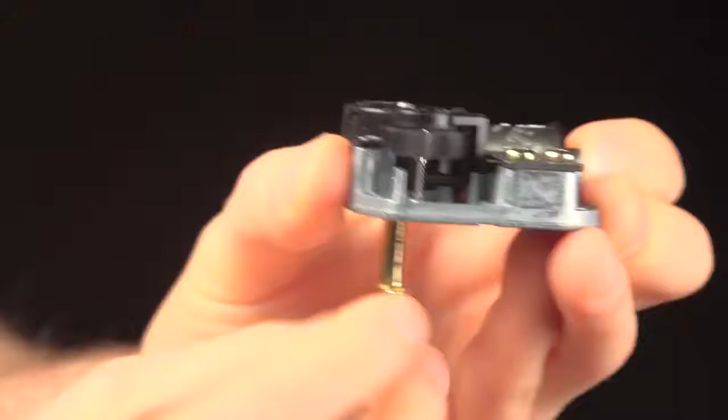Automated music boxes began as cumbersome sets of bells struck by hammers, but over the course of several hundred years, they've evolved into compact devices like this one. I'm sure you know how it works. Wind it up, and it plays a tune.

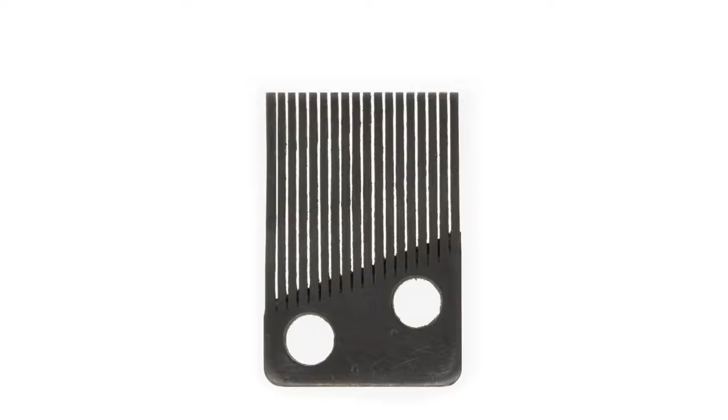The melody is programmed on this rotating drum. The drum has protrusions called pins that pluck the teeth of the comb. The comb is a piece of steel with 18 teeth. Each tooth is a note. Longer teeth are lower notes, and shorter teeth are higher notes. The comb works like a multi-pronged tuning fork.

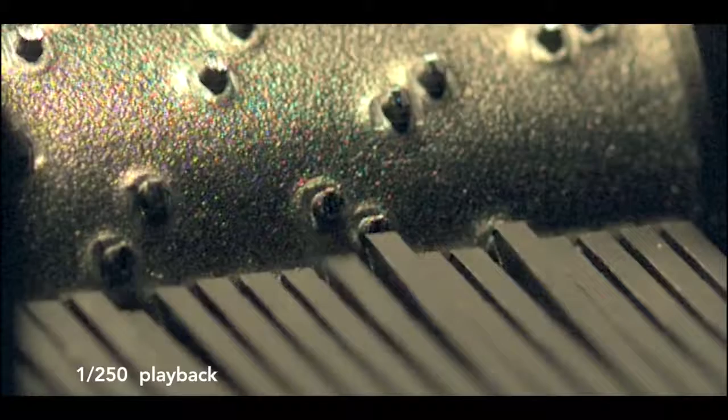In this high-speed video, slowed by 250 times, the drum appears not to move, but you can see the teeth vibrate. The shorter tooth is vibrating faster than this longer one. These vibrations produce the sound.

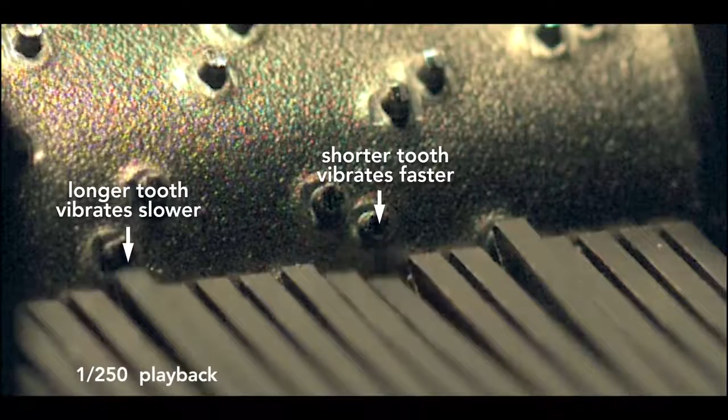The teeth are like this saw blade. When it's longer, it produces a lower note when plucked, and when shorter, it produces a higher note.

Notice when you turn the comb over, the teeth don't have the same thickness. The longer teeth, the lower notes, are weighted more on the ends. This added weight lowers their resonant frequency even farther. Here, I taped a lead weight to the end of the saw blade, and it produces a lower note than without the weight.

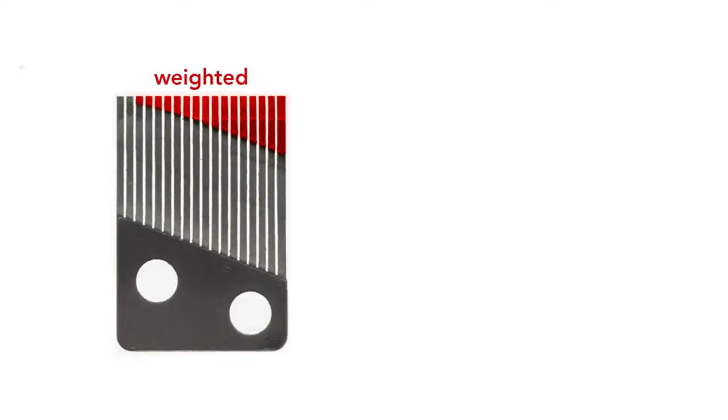Because of this weighting, the comb is more compact. For this particular design, if the comb were unweighted, it would have to be roughly 40% longer to produce the same range of frequencies. Another advantage of the weighting is that the combs can be mass manufactured in a single size. You just cut away the proper amount of material to produce a unique set of notes.

For example, although each comb has 18 notes, the specific notes vary for a particular song. Here's a music box playing London Bridge with a comb specifically designed for this melody. And now here it is with a comb cut for a different melody, This Old Man. The timing is the same, but the notes are different, and it sounds odd.

The difference in weighting is so subtle that these two combs are indistinguishable by eye.

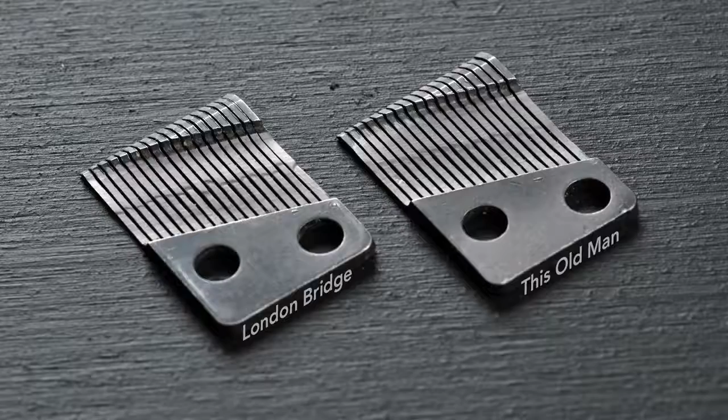Inside the casing of the music box is a clock spring. It's a coiled strip of steel that is 40 centimeters long, unwound. The outer end of the spring has a T-shape which affixes to the casing of the music box and so holds it in place. The inner end of the spring has a slot. This slot hooks into a notch on a metal shaft. This shaft is attached to the winding key.

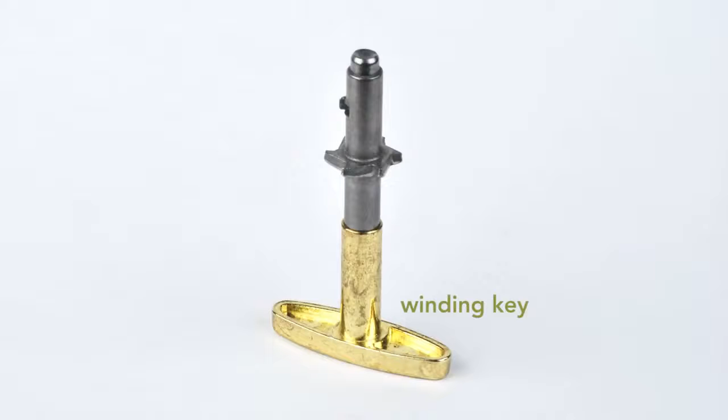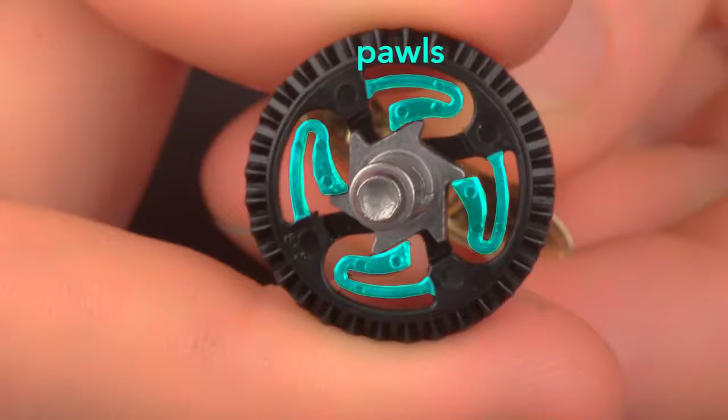The shaft also has an angled 6-tooth ratchet gear. This gear fits inside this larger plastic gear. On the inside, there are 4 flexible pawls so the axle turns independently from the plastic gear. This happens when the music box is wound.

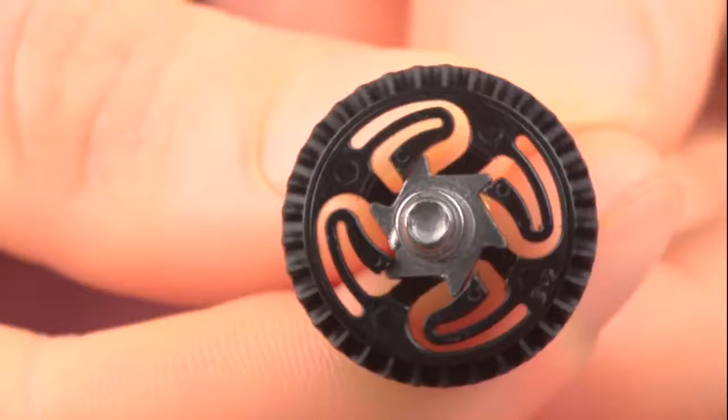When the spring unwinds, the axle turns in the opposite direction and the 6-tooth gear catches the pawls, which rotates the larger plastic gear with it. This rotation drives the music box. As the spring unwinds, it rotates this bevel gear, which engages a second bevel gear affixed to the drum.

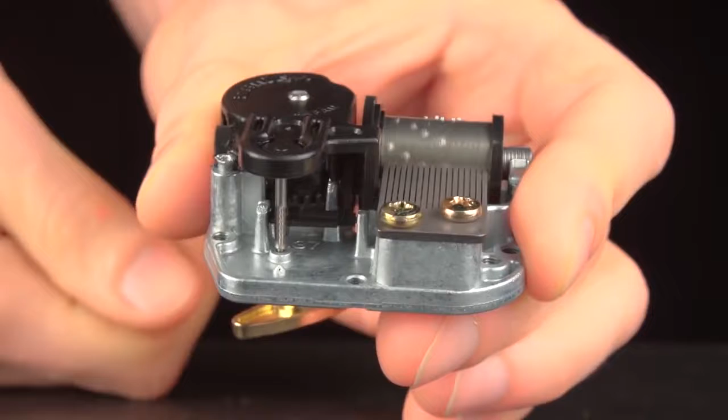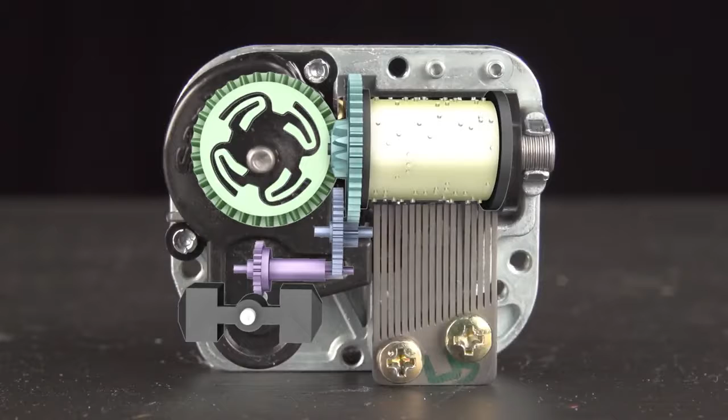But there's a problem with this setup. The spring will unwind quickly and the music will play too fast. This piece, called the governor, solves this problem. It's connected to the drum by a gear train. The gear train is compactly built into the music box. The rotation of the governor controls the speed.

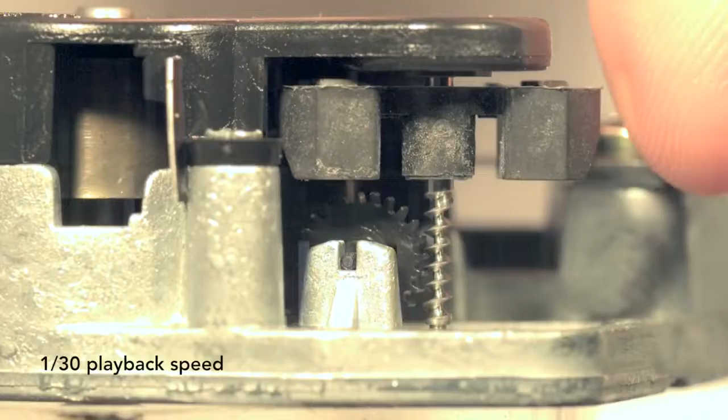Stop the governor and the drum stops. The governor uses air resistance to control the release of the energy from the spring. Air resistance is proportional to the velocity squared of the object. When started from rest, the governor encounters little resistance and speeds up readily, but when it spins rapidly, over 3,000 revolutions per minute, air resistance swiftly increases, which prevents it from moving much faster.

This action limits the speed of the governor and limits the rotational speed of the drum. To spin the governor so fast, the music box uses a multiplying gear train.

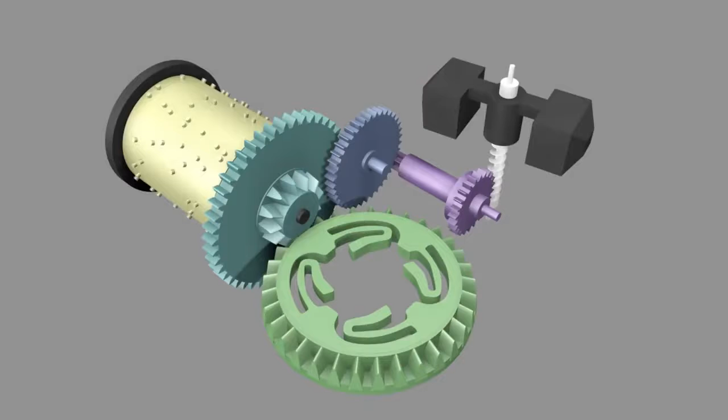It starts with the bevel gear driven by a spring, which engages a smaller gear on the drum. This multiplies the rotational rate by the ratio of the number of teeth on the larger gear to the number of teeth of the smaller gear, here 2.75 times.

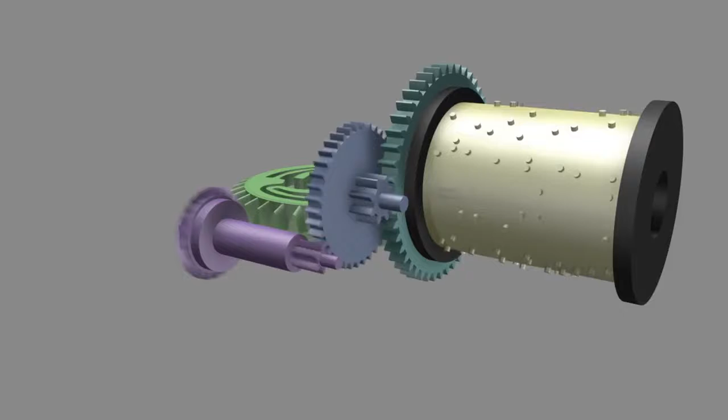The drum is also affixed to a larger gear, which engages another smaller gear, this time multiplying the rotational speed by 5.75 times. The larger gear on this piece engages the smaller end of another spur gear, further multiplying the rate by 6.3 times. Lastly, this spur gear engages a worm screw on the shaft of the governor.

It moves so fast it's blurred. Here, slowed down by a factor of 30, the movement is visible.

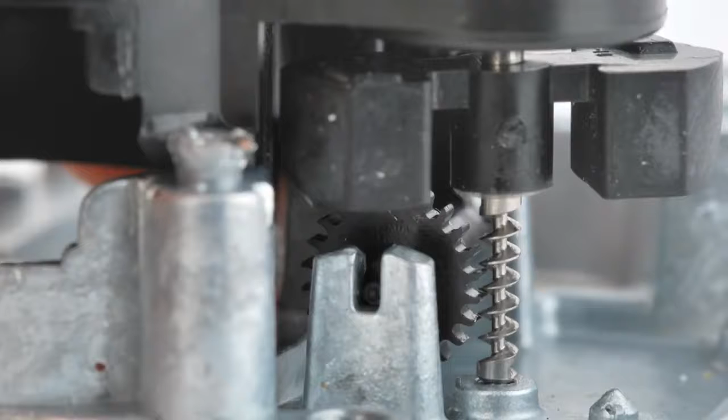The gear that engages the worm screw differs from the other gears. It has curled teeth. The shape of these teeth allows it to better engage the screw.

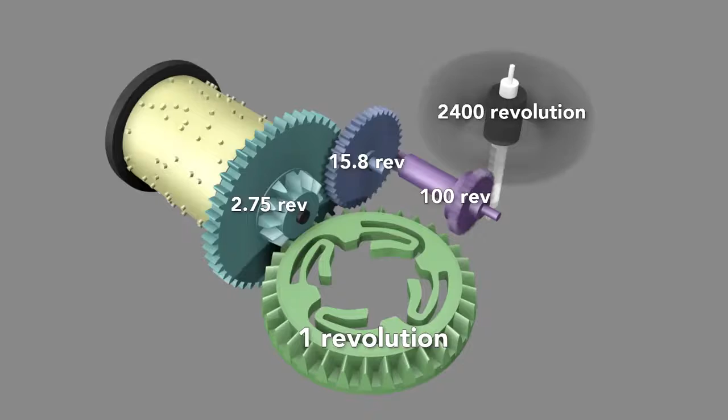The worm screw turns once for every tooth on the gear, and since there are 24 teeth, it multiplies the rotational rate by 24 times. This means that for every single revolution of the first bevel gear, the governor rotates 2,400 times. Since the first gear rotates roughly 1.5 times a minute, the governor spins at 3,600 revolutions per minute.

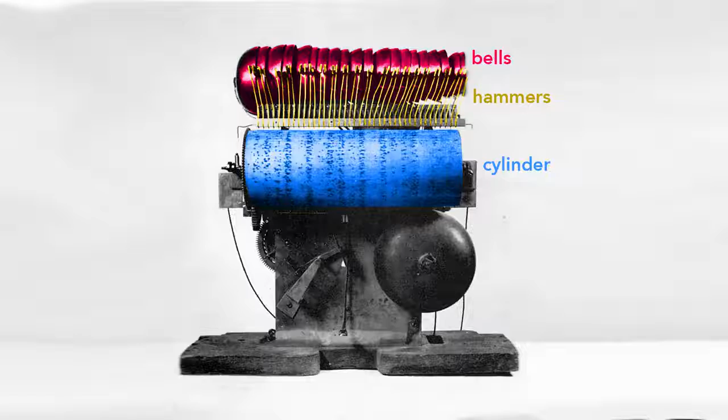As I noted, this music box evolved from devices that used bells struck by hammers. The replacement of these bells with a comb was the technical breakthrough that catalyzed a music box industry that blossomed in the 19th century. The compact comb movements were built into snuff boxes, clocks, and large pieces of furniture.

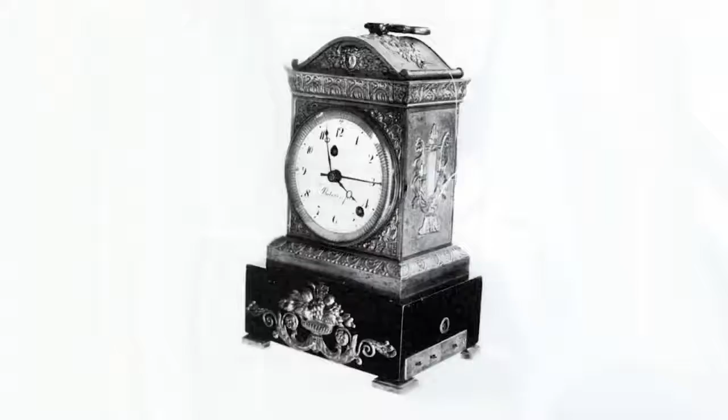As the industry flourished, music boxes grew more complex. Some, for example, sported dual barrels and combs, which played simultaneously to produce rich harmonies.

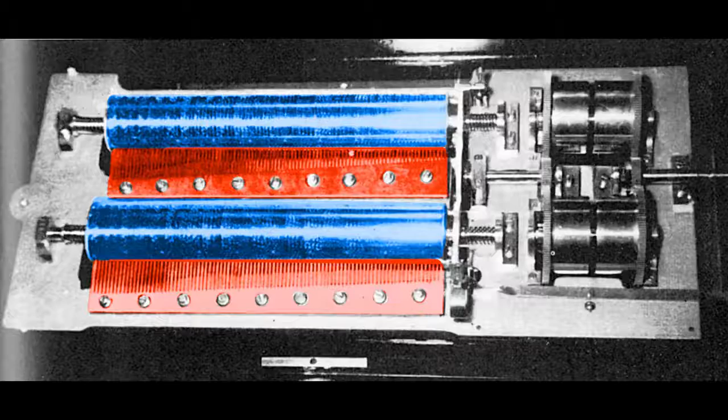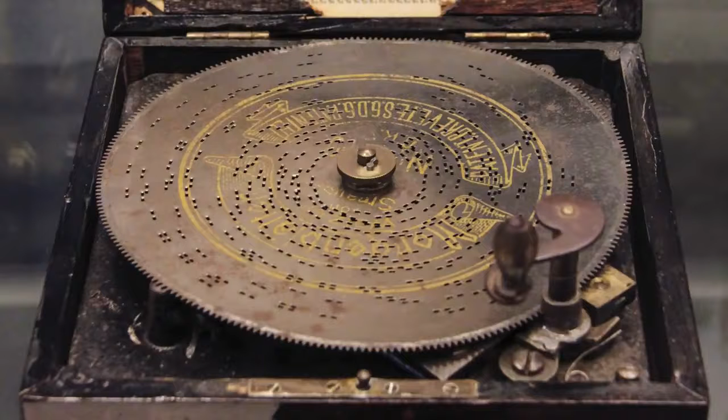The first music boxes used cylinders, but were superseded by boxes that used discs, which could be easily changed. Here, the melodies were punched into a metal disc. With this innovation, music boxes shrunk and their cost declined.

For 100 years, music boxes were the way a family listened to music in the home. But by the turn of the 20th century, the phonograph and radio had displaced them. Music boxes were shoved into attics or, more often, left to rot in junkyards.

These modern music boxes, then, are a charming vestige of a past filled with brilliant engineering and craftsmanship. One last thing.

If you hold a music box in your hand, it's not very loud. But if you place it on a hollow container, it's much louder and richer. The vibrations of the comb are transferred through the metal base into the container where they resonate. This resonance amplifies the sound.

Also, if you rest the music box gently against your teeth, the music will resonate inside your skull. So, the next time you listen to a music box, appreciate its sound, but also think of the centuries of innovation and design that led to it.